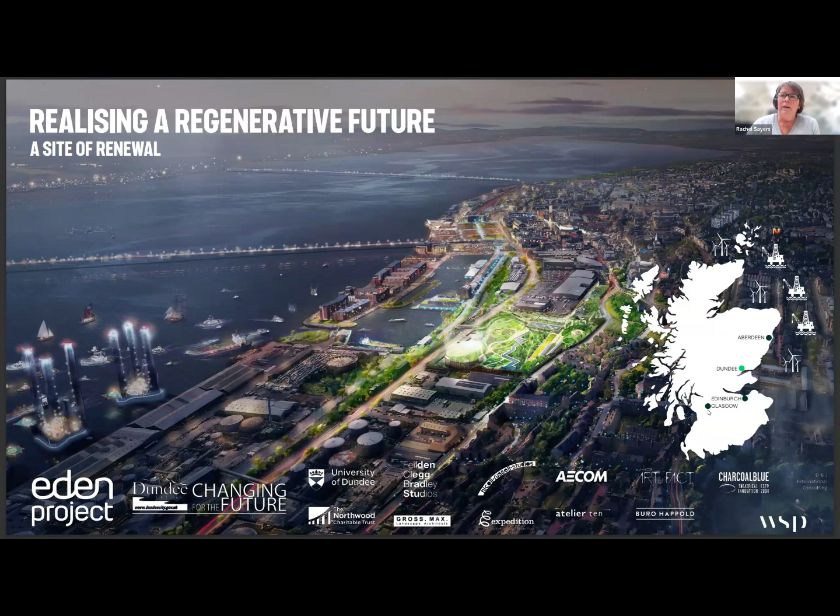For any designer, being given a brief which starts with a charter is an enviable position, if slightly intimidating. This charter from Eden has the twin purpose of guiding both design decisions from the team for the built and the grown scheme, but also of guiding how people can have ownership of the project, the social narrative, and the social and economic regeneration. It sets out a set of principles which guide and shape the interactions between Eden and the place.

I think the narrative is really embedded in this idea which the creative team at Eden have come up with, which is that we are living at a moment where we look back to a deep past. We have an anomaly of crisis at the moment, but they have a hope that there is also a long future.

So the story that they're telling people who come to visit this scheme really is one of the parallel tracks of human history and natural history, of how we have depleted the Earth's resources, and how we could become more aligned over time, looking forwards, if we reflect on how we behave, and behave differently going forwards, inventing new stories, new futures of a much more circular nature.

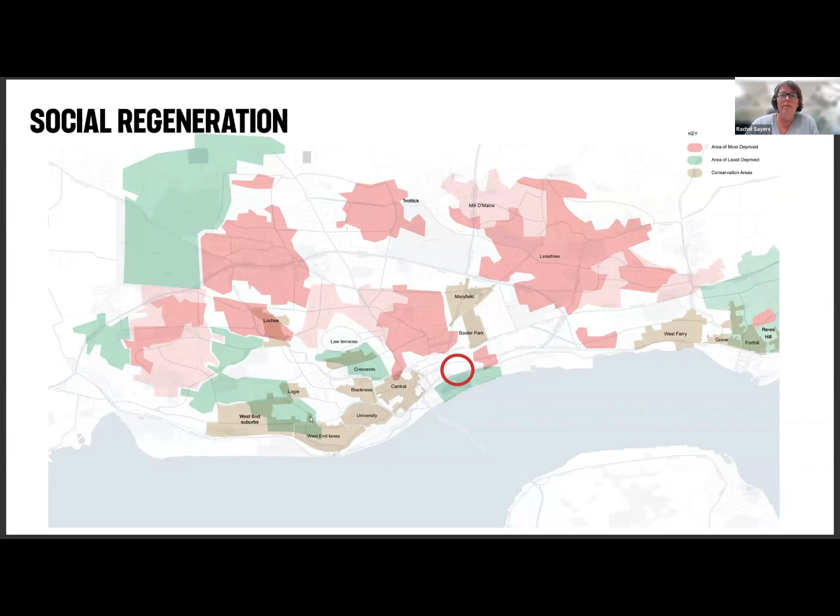This is the spot where Eden will be located as a sort of hub, but really it's about having a whole set of places throughout the city. It's the first time Eden are thinking about being in an urban setting.

And I think there's a real sense of wanting to engage with the citizens of Dundee, and a coming strong sense of ownership.

And for that, there has been a reinvention of the 9 trades of Dundee into a set of future-looking guilds. They're people-based organisations, and it means there can be a strong sense of engagement, and they're sort of seeds from which new regenerative ideas and actions could grow. So they are underpinned really by the perspectives and skills needed for the future. Everyone engages with them so wholeheartedly at the consultation events throughout the city, which are ongoing.

There's a long run up to a project being built, and the idea is that these become live organizations with bases in the city, which can start to capture the energy and hope for working differently. So in a way, when the door opens on Eden, all of this will already be in place.

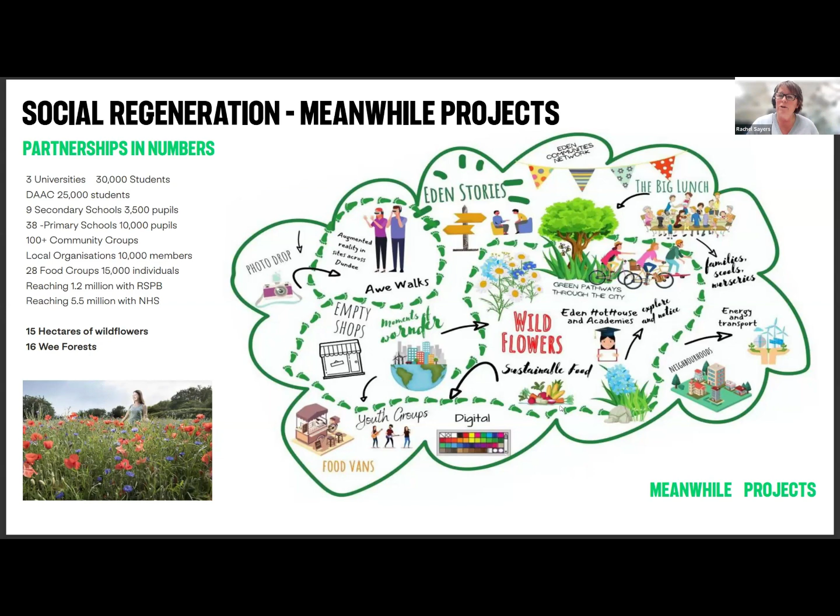If you've been to Dundee, you might have noticed the Wildflower Project, a 3-year funded project which is starting to make visible small pockets of transformation in the city. I'm not doing the work that Eden do justice by just highlighting that, but I wanted to emphasize that this is a twin project between visitors coming to the city and a sort of economic regeneration and education which comes with that, but also really rooted in all the endeavours which happen in the city as well. So it is city regeneration.

The site is towards the east, and it's on a loop, a string of pearls if you like, of other places within the city which exist at the moment and which are to come, and all the regeneration which has already started. So it's looking into a wider picture.

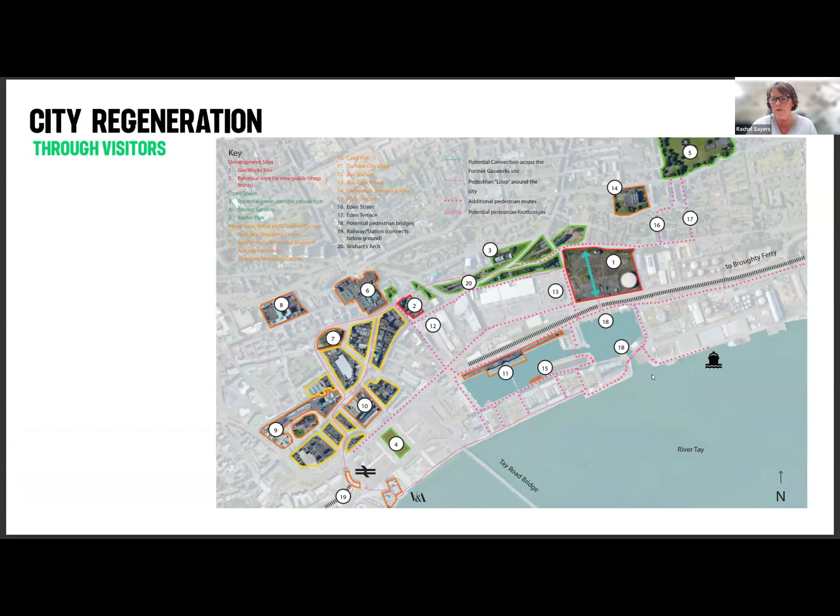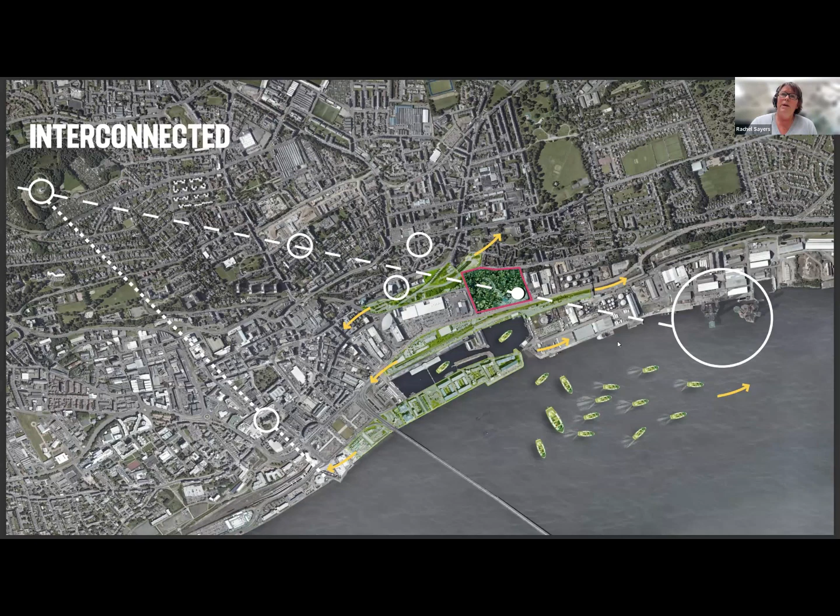But I suppose at the heart of it, it is looking to transform one place quite radically, which was a former gasworks, and then spill out into the city along green pathways, connecting back into the multiple green places which already exist in the city, referencing topography, and possibly even resulting in a fleet of boats which could go around the UK and beyond, educating as they go. So there's a big vision of it being interconnected and highly networked.

Of course, anything which claims to be regenerative — and this vocabulary can be used a bit too loosely sometimes, so we measure how much we use it — but it must be based locally. There's a whole mapping exercise, of which this is just a glimpse, looking at the opportunities to grow and make and build out of what is close to Dundee. So not only is it culturally of a place, but it's also building up a resource locally for future projects and patterns of making and building.

The site was actually half land and half water. It was a part of the River Tay, and it's partly made ground — it was made as part of the whole Dockland development, to bring energy and gas into the city and the wider region, and it remains a key entry point for that.

So it is a symbol of a fossil fuel era when we dug carbon out of the ground and dumped it into the atmosphere. When you design on this site, it's an act of redevelopment and restoration, and it has to increase biodiversity — it has to completely transform over the lifetime of the scheme.

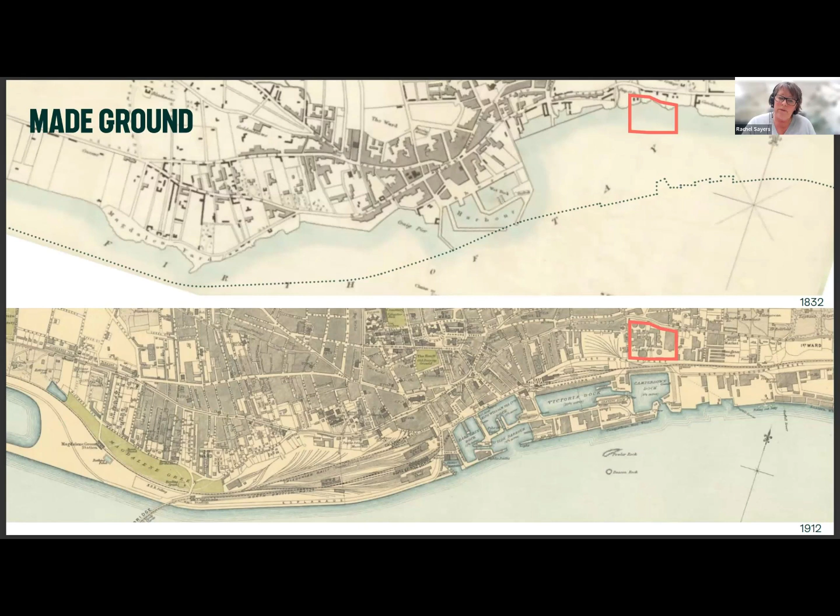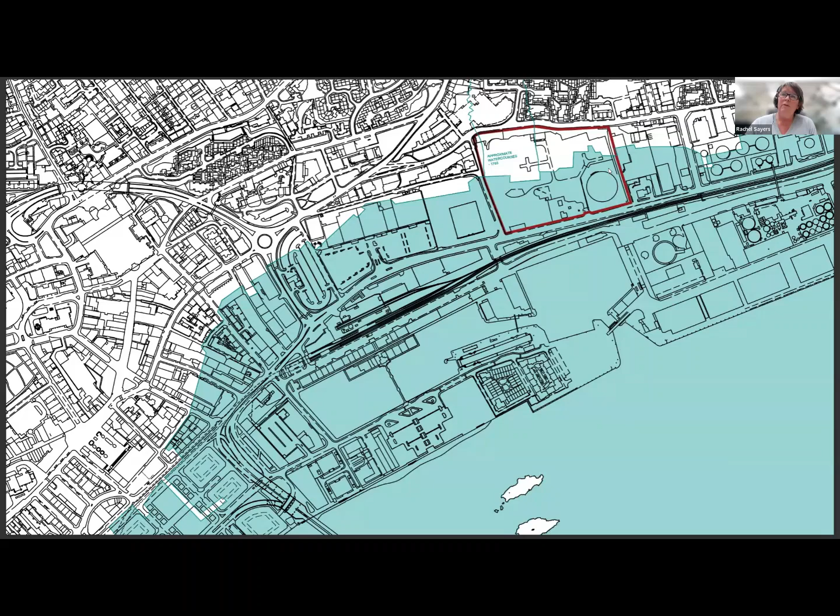So we've got this amazing sense of a water line on a brownfield site, which runs through the centre of the scheme — the remnants of the industrial past. This is the final built form on the site, and it can be seen from space apparently, so it's got a different level of significance. It's outscaled, despite the fact that this used to be sometimes 4 times the height at the moment, held up by gas — it's outscaled by the oil rigs that come into the city to be refurbished.

And we have a sense of the systems thinking that we need. It's just hard work as designers. I think it's easy to fall into the lazy traps of specifying things, choosing things, and having them in a perfect condition, instead of making sure we go back to a fairly raw set of systems thinking.

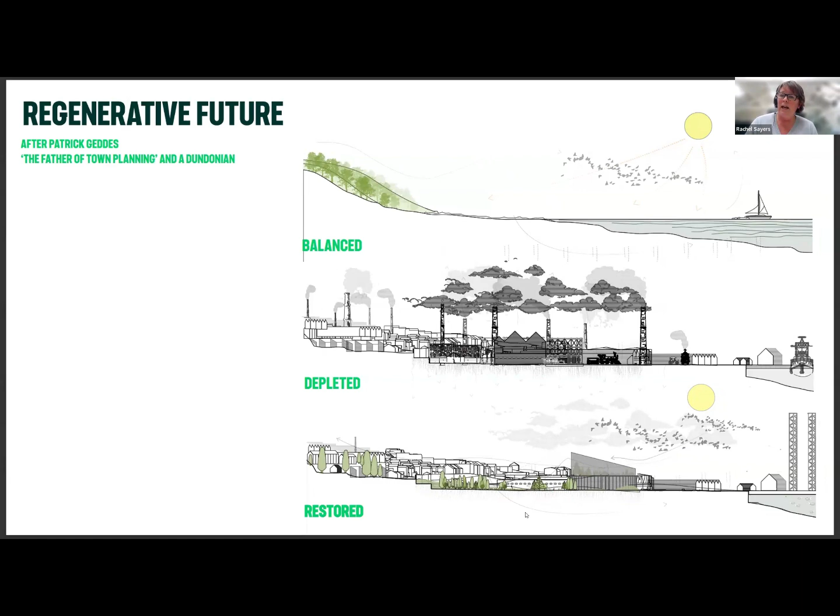Firstly, about the site. It was in balance, then it became depleted, and this was the scale of the operation, which went on for 150 years. And now to a place where it can restore and thrive well beyond this.

This is the site as a piece of industrial archaeology. This is the layers of occupation of the site. It's an amazing drawing we come back to again and again.

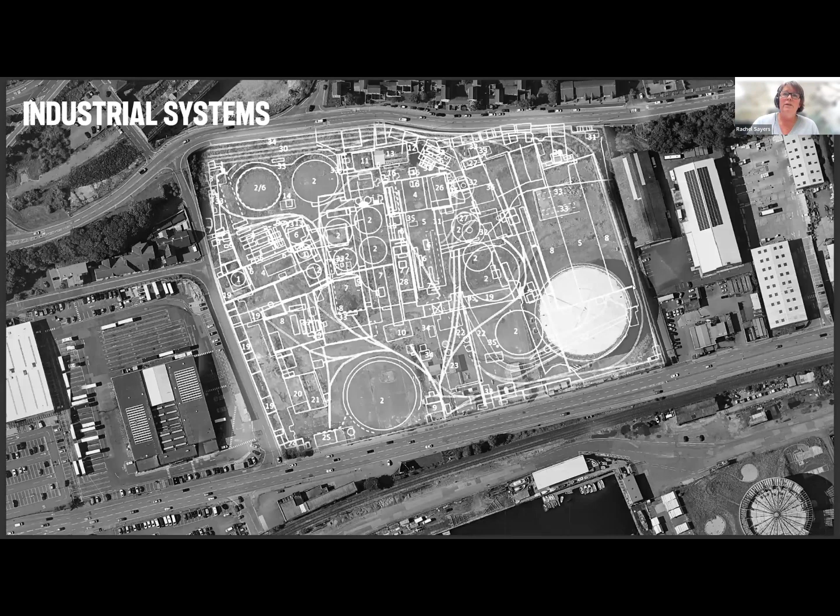I think it's a reminder to us that the circular economy we're looking to create above ground also exists below the ground. You know, 20% of embodied carbon, which normally goes into the building, is below the ground in foundations. So how are we going to not fall into that trap with a further 20% going in above ground?

So this overlay of systems of the past—we're reinvesting the systems of the site as they come forward. We're working with Gross Max, the landscape architects, and the scheme traces the old water line through the site.

The scheme acts as a gathering space, with the main entrance threshold to the city along Foundry Lane. This is where you arrive and land. There are routes down through that threshold, and a new bridge by Nicoll Russell Architects, working in a way that ties the whole scheme into the city.

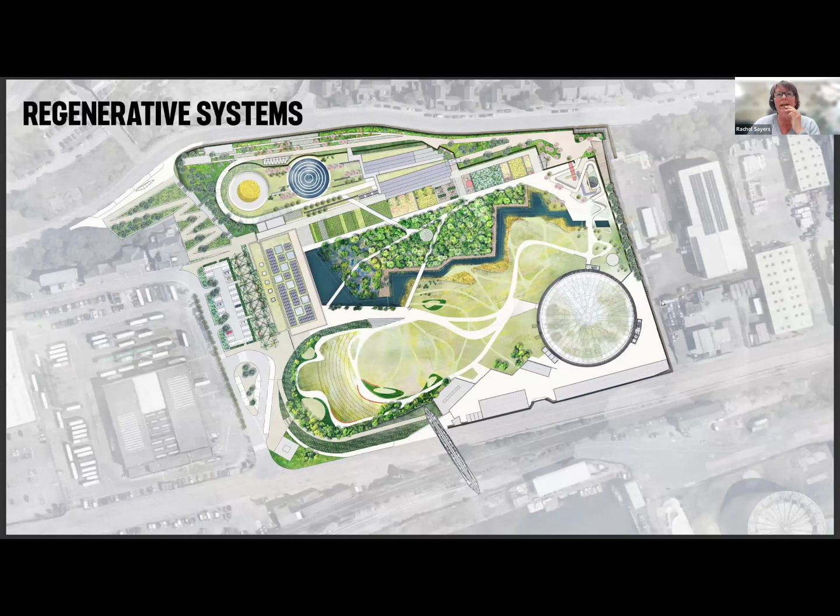So it's an integrated piece across the site, with multiple different characters of landscape. I always think we should be talking closely with the other design disciplines, because it's not just architecture—it's a whole set of systems which exist.

Just to help orientate yourself, here's an entrance point for a building called the Valve, which is outside the pay barrier. So it's a new room, a new space for the city, with a new sense of arrival—a reworking, reinvention and recycling of the gas holder at scale.

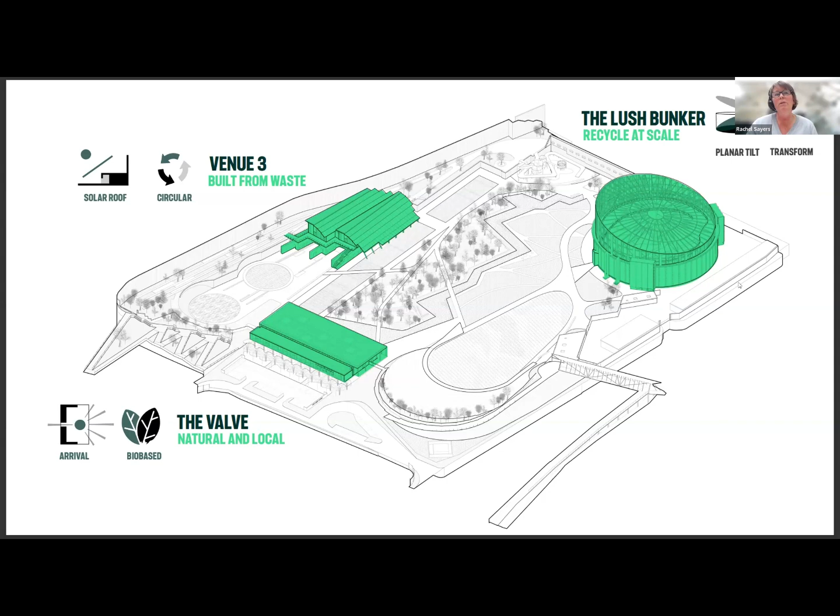And a new piece which relies on this upper platform on the site as it is at the moment—a new piece built from waste, a picture of reuse and recycling.

Of course, there's no real rich soil there, so it's going to have to be rebuilt, and habitats will be established.

Our drawings always show something which is sort of 15 years on, but it's basically presenting a picture of where it's all going—energy cycles and material use.

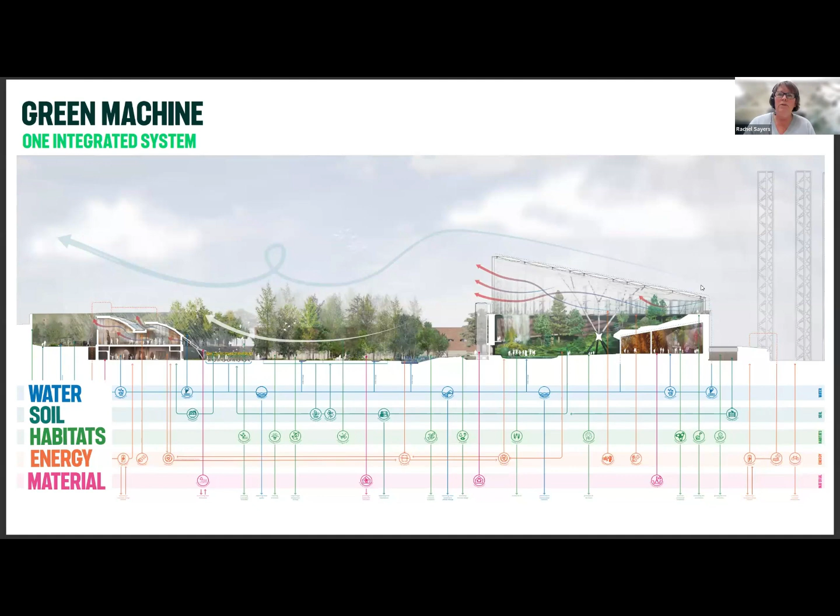So this is a casting forwards, a picture of how it can develop. And Gross Max talk about this 'green machine,' because really the foundation of the whole thing is their landscape and the waterscape which they develop.

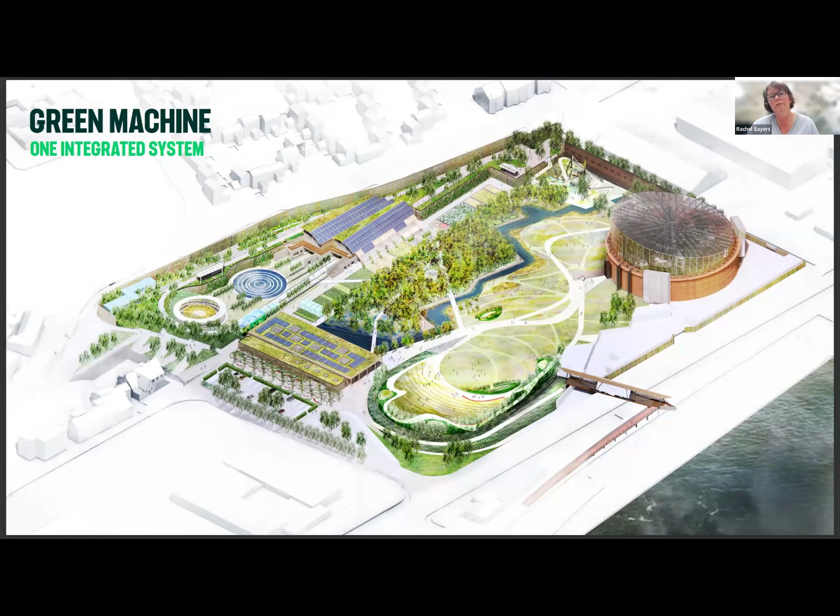And this is more than recreational—it's useful. So if there's sudden rainfall, it's an absorber so that this whole site doesn't flood. And it can also be used for play and recreation.

So there's a whole layer of different character types of landscape, but one integrated system in which the buildings work—each building captures rainfall and sun to power and create energy.

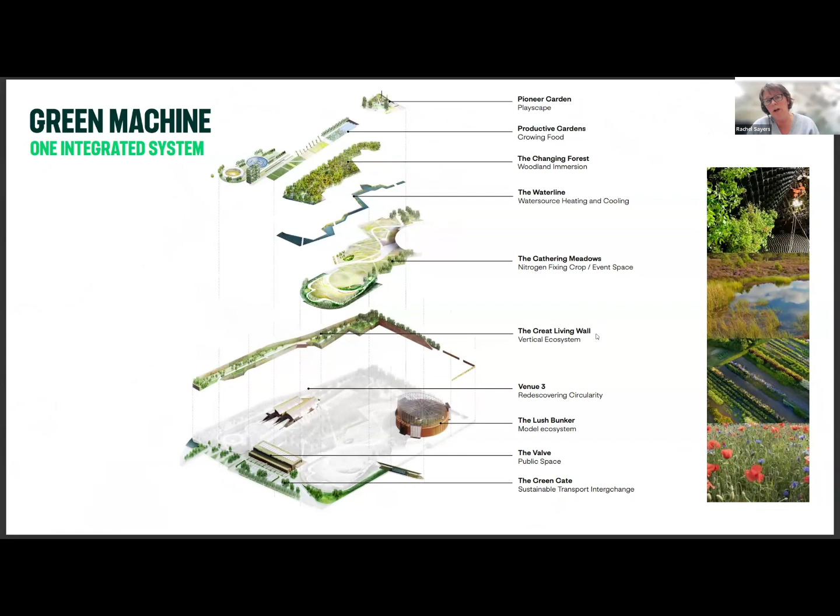So it's very much a circular system. And there's a gift on the site really, which is a huge stone retaining wall which faces south.

They've termed it a great living wall, which will have a whole multiple variety of environments stretching along it—habitats that will be formed, pockets of productivity, seasonal planting, and all sorts of things like that.

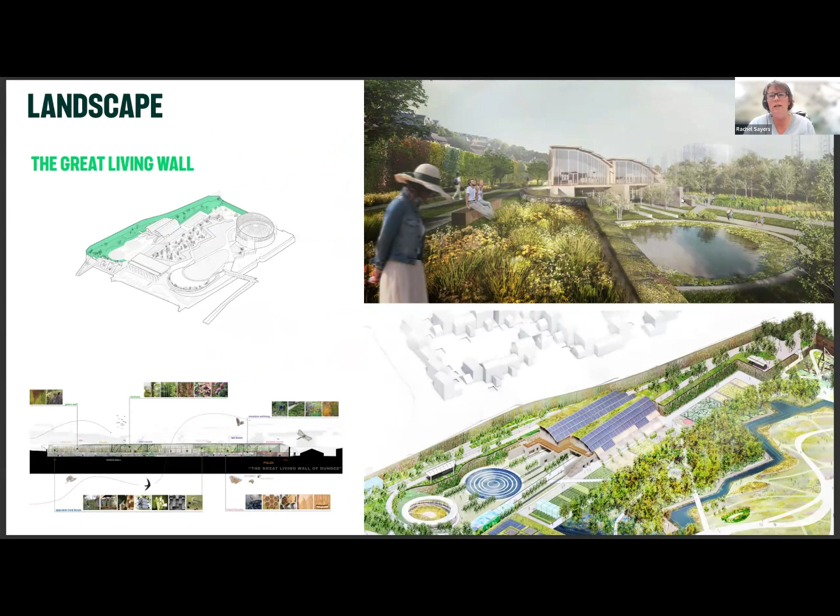I mean, all of this is quite propositional. We have planning, so it's real, but there are also lots of questions still to ask. We don't have all the answers yet, and we're still looking for the best possible solutions to take these industrial remnants and grow them.

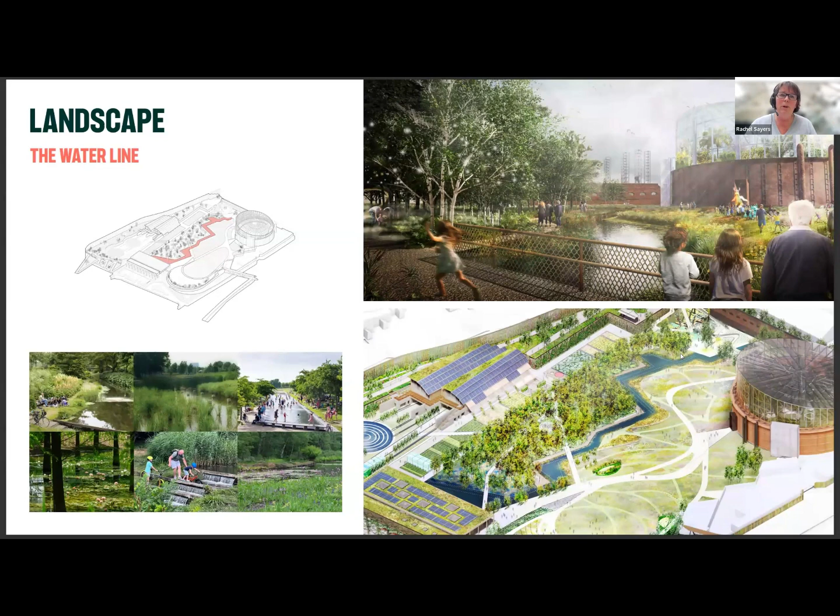To grow them into a place which is both for visitors to come to, to learn and think through, but also for people in Dundee to come and use in their communities.

I think Eden Cornwall has over 600 partnerships with communities. It has apprenticeship schemes, a vast range of educational learning programs at all stages, and over 50,000 school children visit the Cornwall setup every year. So it's really got the door open very wide.

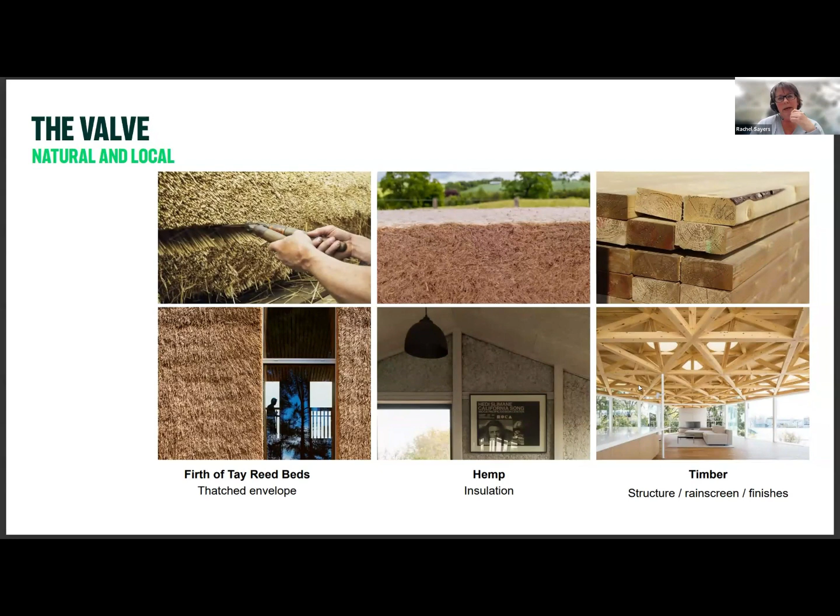So just to take you through very quickly the three buildings. They have an agenda to demonstrate a regenerative process. This is the point of orientation and amenity here at the site, tasked with demonstrating natural and local use. So we're tapping into bio-based cycles. And it has at its entrance an extensive green structure, which is made of, we're hoping, old telegraph poles. It's a marker, a canopy for the city, and a civic scale sort of venture.

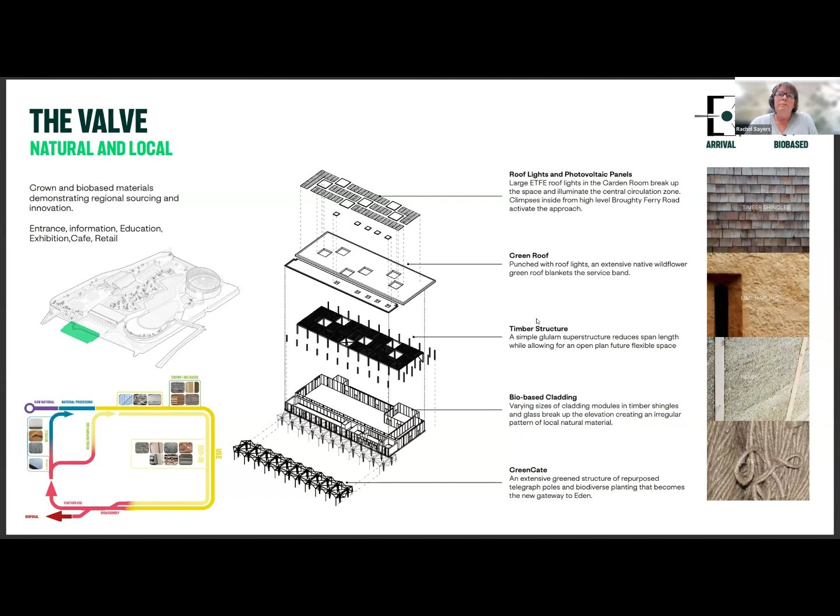Every time we think about materials we're using, we're trying to draw them and describe them in a cyclical way. Which part of the cycle are we getting materials from? What proportion of each building comes from which stage of the cycle, and where will they go? Could you pick this building up and put it somewhere else in the future? I think we've got to a level of detail where we're thinking how this is made, and this is just a glimpse really.

We're working with expedition engineers structurally, and I think one of the challenges is this issue of transforming how we think about how we support buildings underground. Expedition have come up with these conical structures, which vastly reduce the amount of cement in them, and they also occupy a very shallow part of the site. So when it's remediated ground, we really want the whole scheme to kind of float across it rather than digging down and making complicated junctions. There are these pointers towards solutions here.

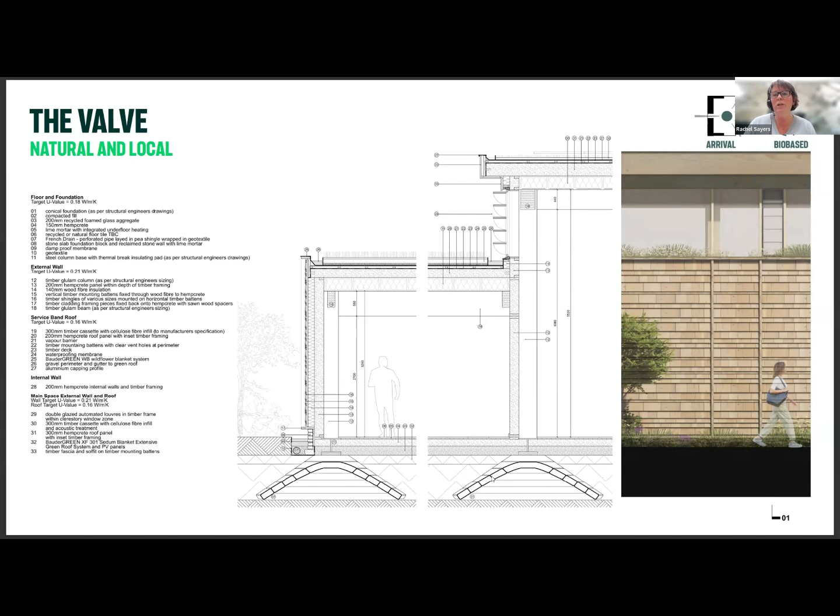I'll keep going because I know I haven't got much time. At large scale, we're reusing the gas holder. The way we're forming the structure of this lush bunker, it's two worlds. When you go into it as a visitor, it has a dark scene at the lower levels and a living forest at the top levels. So you're invited to take a journey through deep time, talking about the formation of the earth and the laying down of the coal seam, to witness human extraction, and then emerging into a planted world of abundance.

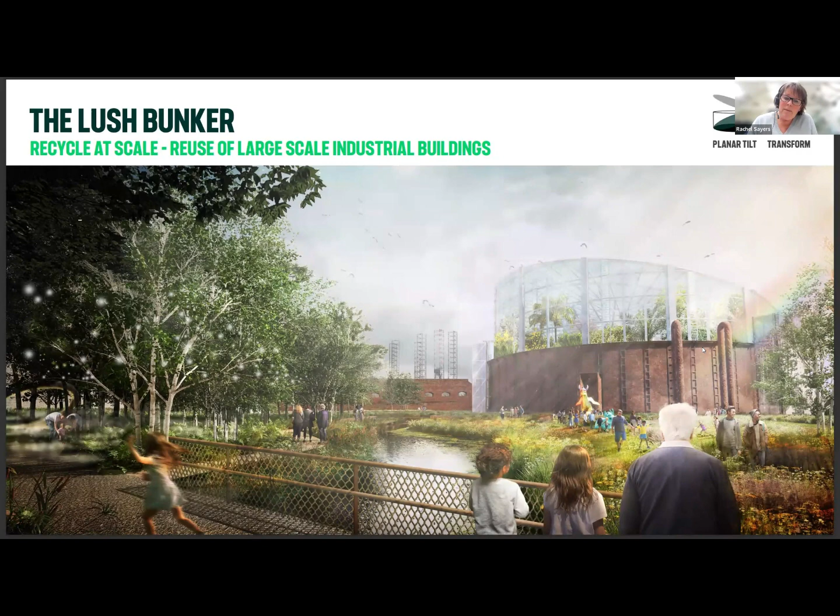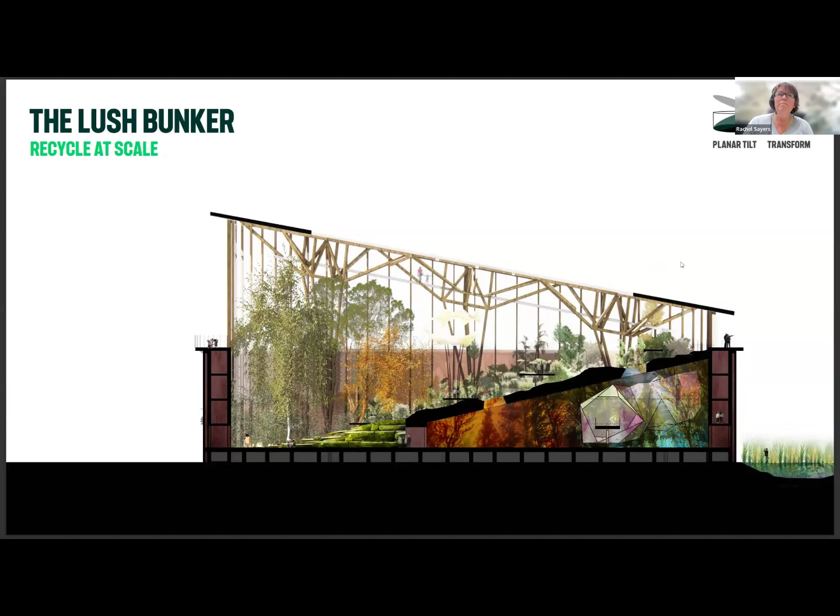So this is what it will look like inside, we think. This is sort of 40 mil thick steel, and we're obviously going to try and reuse the foundations that it's on. The whole structure of these is actually very lean because it was held up by the gas, and we need to find a new support mechanism. That support mechanism is going to follow the same structural paths as the existing gas holder, so to try and make it lean in terms of its use of materials.

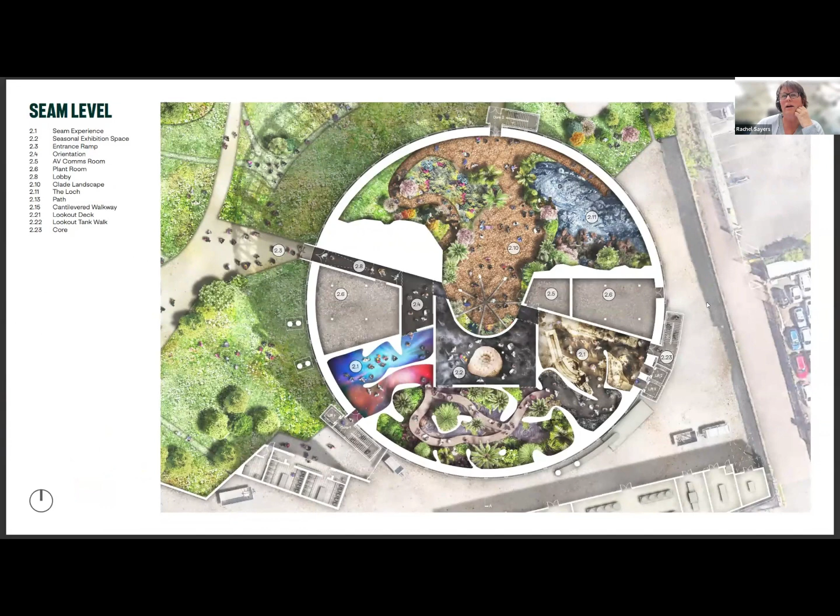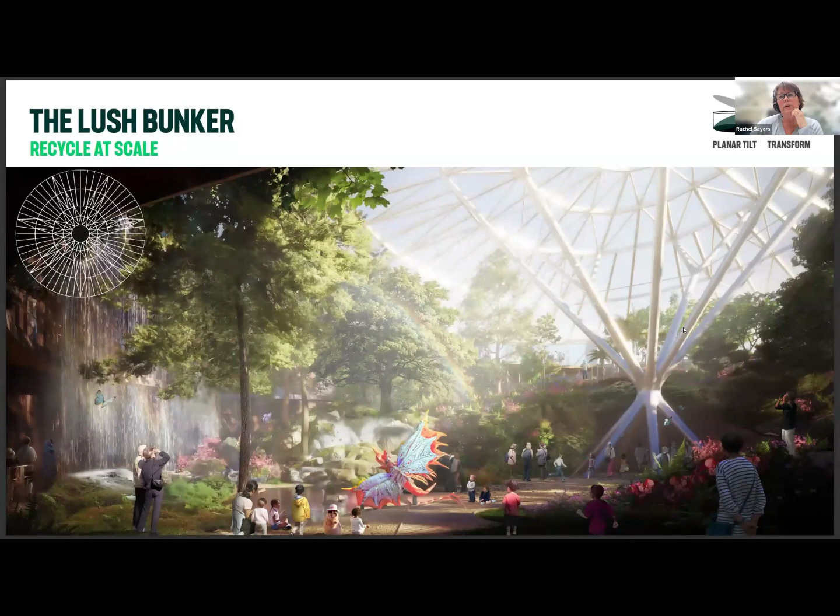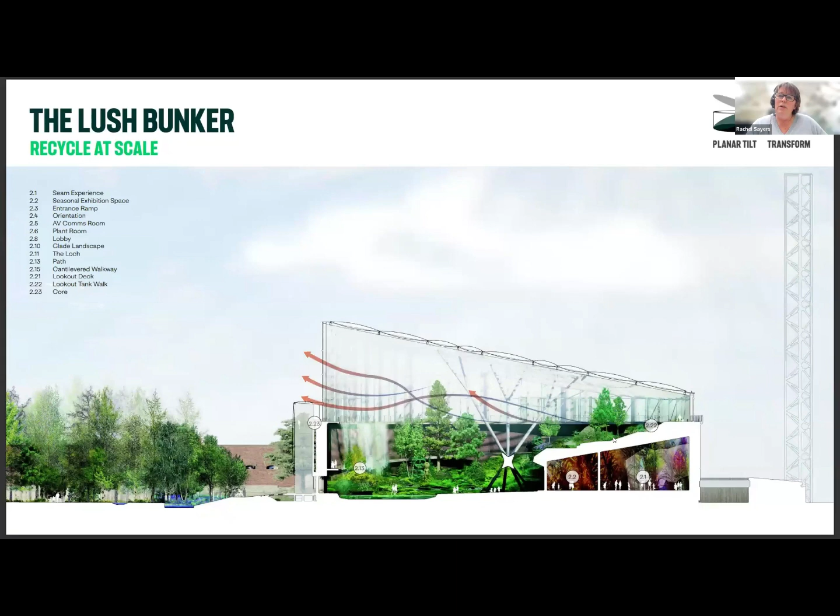This is a picture really of the immersive experience to uncover the storytelling, from below this dark seam that you can go up into the living forest beyond. There's been really careful consideration of how you make this a comfortable environment for the plants rather than the people, working back from the environment we can produce with passive means and the planting which would suit that. So this is deliberately not tropical, it's meant to be native species, but a sort of thriving environment. Below ground, this dark seam, and above, this living forest.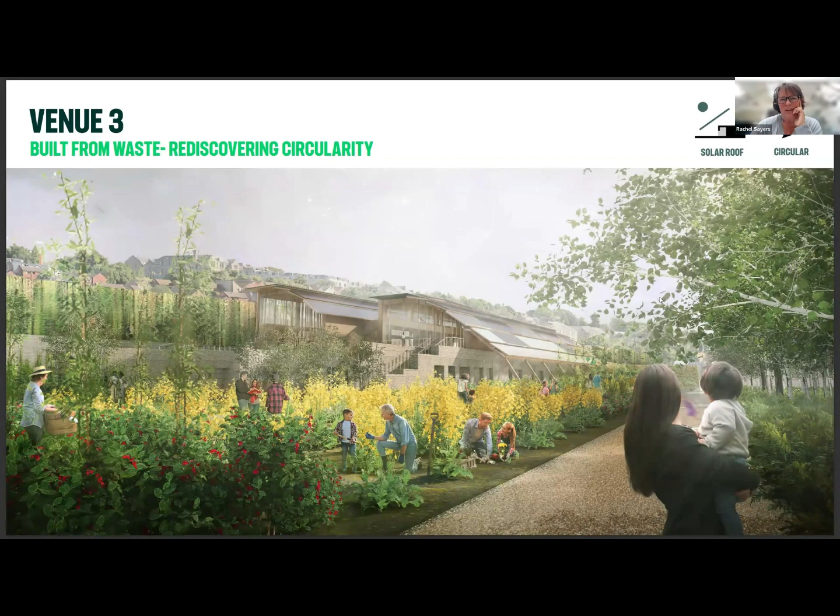The final space has an agenda for demonstrating how you could build and reuse waste - really harvesting, or urban mining as they call it, from the city. We've had discussions with Dundee City Council about tapping into the planning system so that you can maybe pick up materials from demolished buildings and reuse them in the city.

The building recalls the rich history of Victorian greenhouses and other agricultural forms, which are highly functional and beautifully engineered. This has the opportunity to face south so that you're really harvesting the resources and the environmental forces that you have.

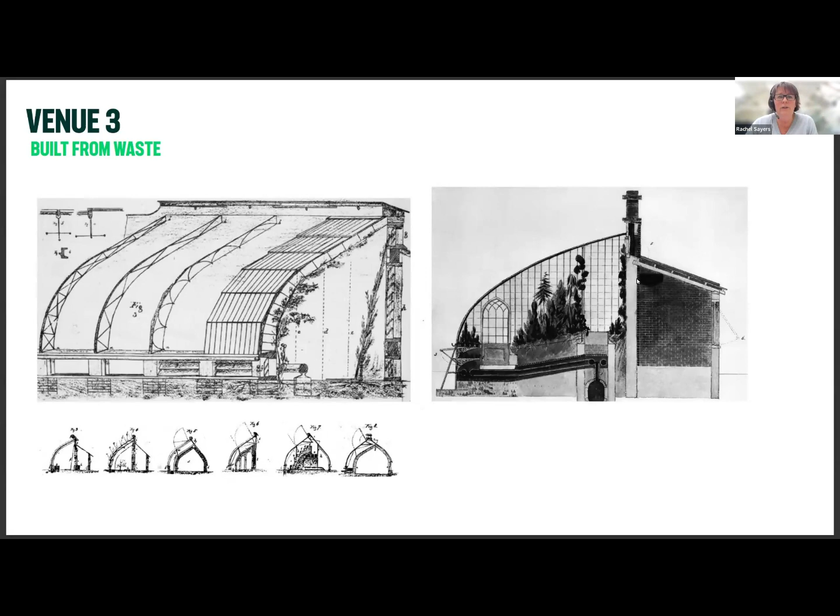So there's a huge exhibition space where people will be able to reflect on what they've learned and think about the new stories that we need to underpin a different way of thinking and behaving. Here you can see the echo of the Victorian glass houses, but they're not glass. It's a repurposed steel frame, which extends down into the landscape, forming a sheltered space for visitors to sit.

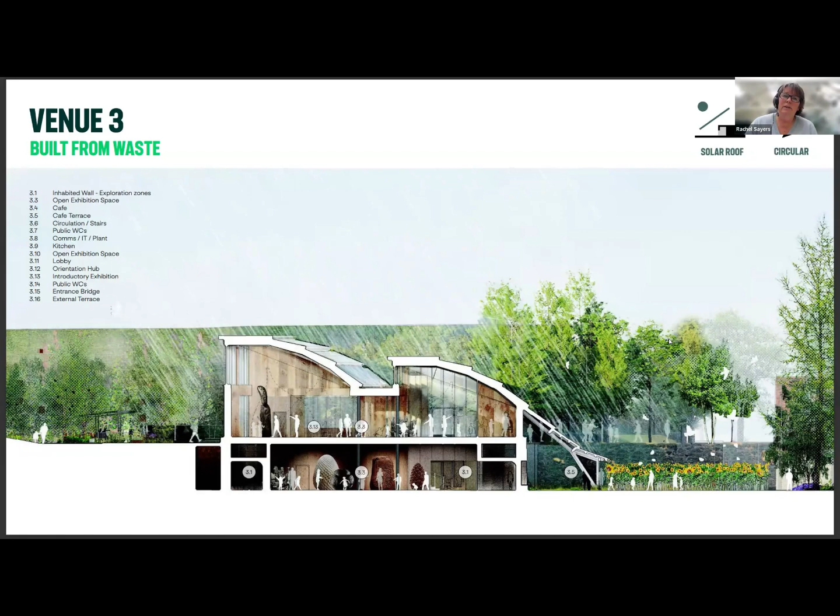Yeah, so looking to capture materials into different frames. I think I'll leave it there really, but it is obviously a project which is full of hope, but there's also still a long way to go. I'm hoping it's a story we can share regularly along the journey, to see what we discover and the solutions we come across. Thank you very much.

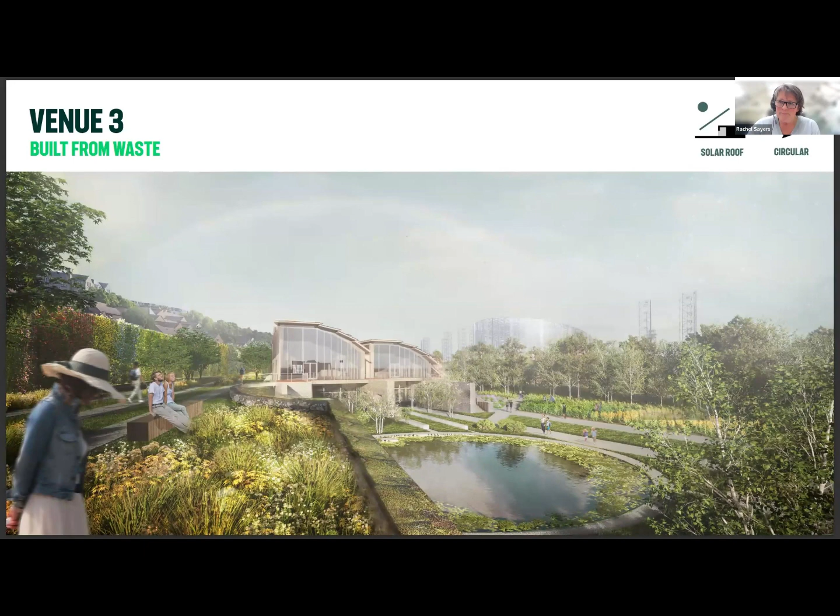So I'm going to change the narrative from energy to community. As Gloria mentioned, I've been a researcher at MEARU for the last 11 years, almost coming up 12, doing building performance evaluation, going to people's social homes and finding out how they use their homes, not just for energy, but how they feel comfortable in them.

Working with these households over this time, I've observed that many individuals struggle to adapt to our built environment. And to me, that highlights a lack of resilience in our society.

So earlier this year, I co-curated an exhibition which showcased 30 years of MEARU's research, which focuses on all aspects of environmental architecture. While reviewing the archives at the Glasgow School of Art, I was struck by materials from the early 1980s, where people were campaigning against fuel poverty. That led to MEARU's first project, monitoring a passive solar retrofit in 36 thermally substandard homes in Easthall, Glasgow, led by our founder, Colin Porteous, in collaboration with Heatwise and the Easthall Residents Association.

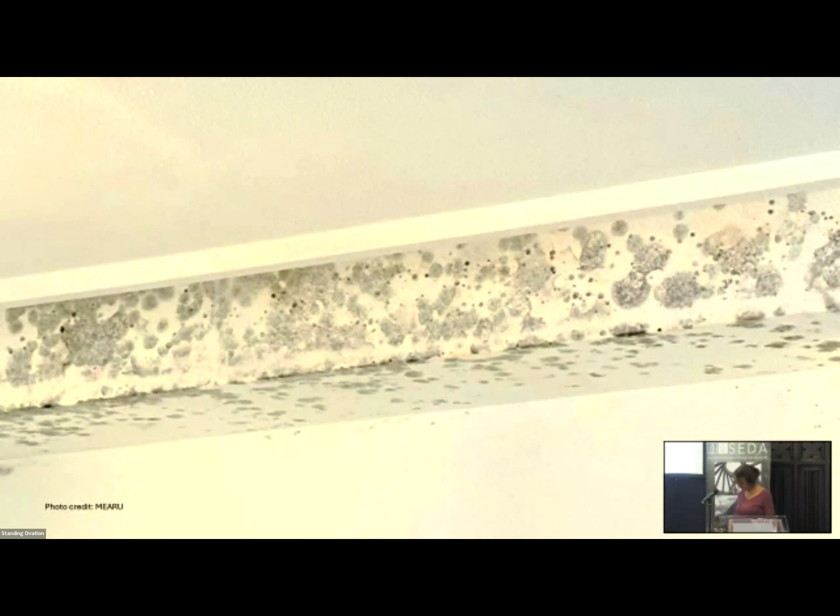Even though Kathy's struggle dates back 40 years, mould in homes remains a crisis today. Nearly a quarter of the UK population reports its presence. And we're waking up to the increasing health impacts linked to ultra-processed lifestyles. Urgent action to tackle all these issues is needed.

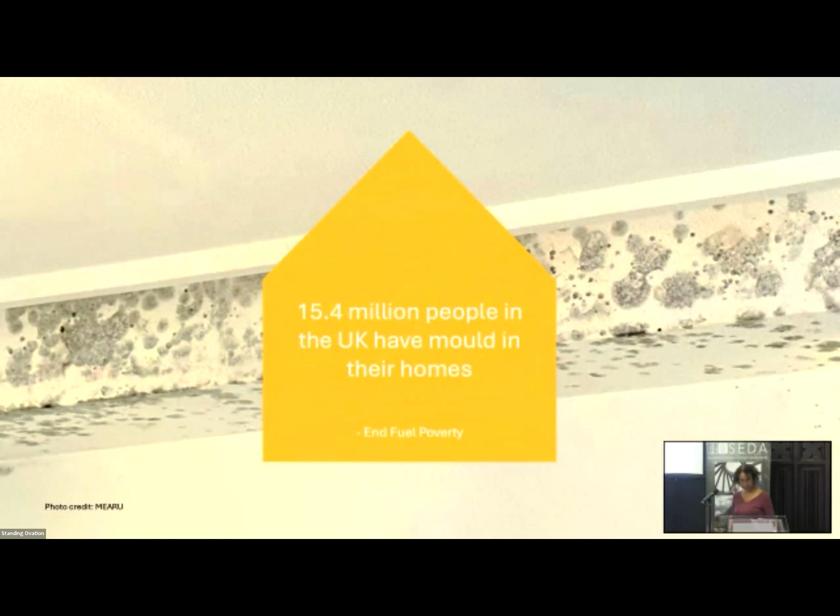When I was invited to speak at this conference, I'd just begun reading Ultra-Processed People by Chris van Tulleken. The parallels between our food system and modern building materials struck me. Talking about our chemical food system, he notes these substances enter the diet gradually, but the incursion gained pace from the 1950s onwards, and now constitute the majority of what people eat in the UK. He highlights a new ecosystem fueled by money, where we are the prey, the source of money that powers the system. Competition for that money occurs between an entire ecosystem of constantly evolving corporations, including deceptive marketing, bogus court cases, and secret lobbying, all vital for corporations to extract that money.

This is mirrored in our buildings and the processes that take place inside them, and Sue mentioned that earlier today. Many of you here are familiar with volatile organic compounds in building materials. However, beyond the structure itself, there are many ways indoor air quality is impacted, with contaminants from our furnishings, cleaning products, and personal care products.

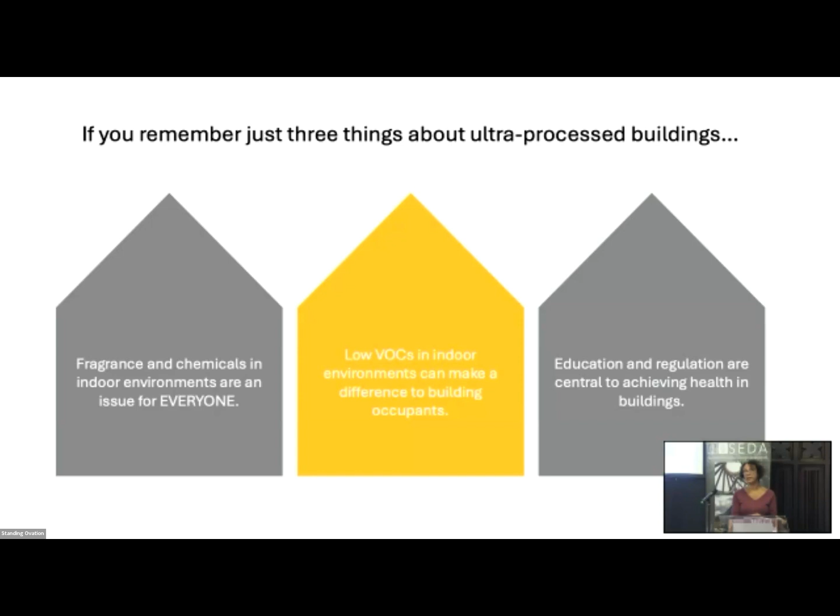By advocating for a reduction of chemicals in all aspects of our buildings and for fragrance-free policies for public buildings, design professionals can normalise the needs of a large sector of society. Now, my last slide, I will just put up and I will not read. Thank you.

After the collapse of the World Trade Centers due to the terrorist attacks in New York in 2001, there was a rapid and incremental increase of carcinogens and VOCs in the air due to MDF and the furniture burning in the building, the furnishings. Everything that was in the building that was caught on fire caused massive problems to health, to air quality, and to some extent, nothing's changed. So thank you for raising that.

As I said, this is going to be a very difficult act to follow. My name's Arno Verhoeven. Thank you, GLOW and SEDA for having me. I'm not an architect and I'm not an engineer. I'm an idiot. And I say that in the most important way.

I'm an idiot because, like Mike Michael, the sociologist from Sussex, I stand outside of society, and when people look at me, they don't understand what I'm doing. They don't understand why I'm doing it. They just look and scratch their head and go, what an idiot. But the point is that I'm doing it on purpose to say that actually we need some of this divergent thinking. We need some of this disruption. We need more people to stand outside and do crazy things. We should be celebrating idiots. We need more idiots in the world.

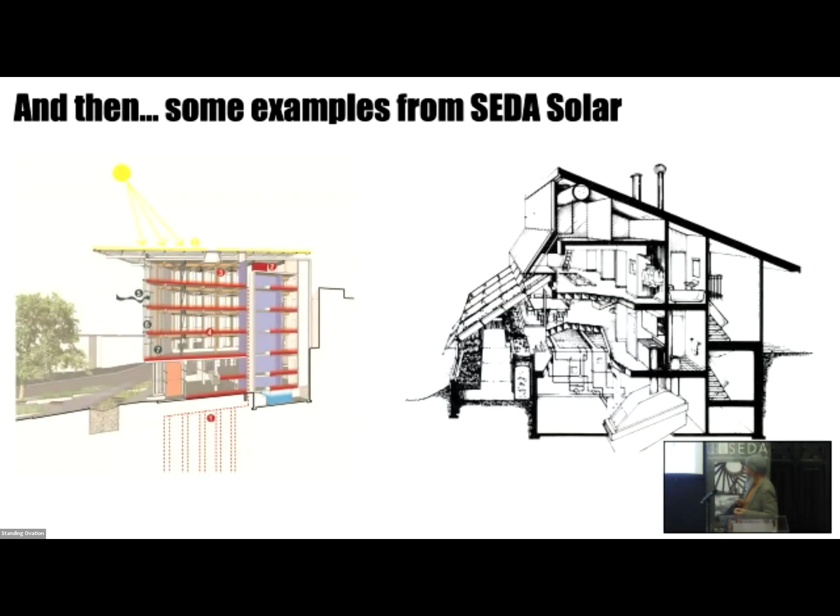And then we've got a clicker that, oh, there we go. On the left, a place in the Netherlands in Haarlem, a seniors community hall, which is using passive solar again to create spaces with warm air circulated through the sunlight.

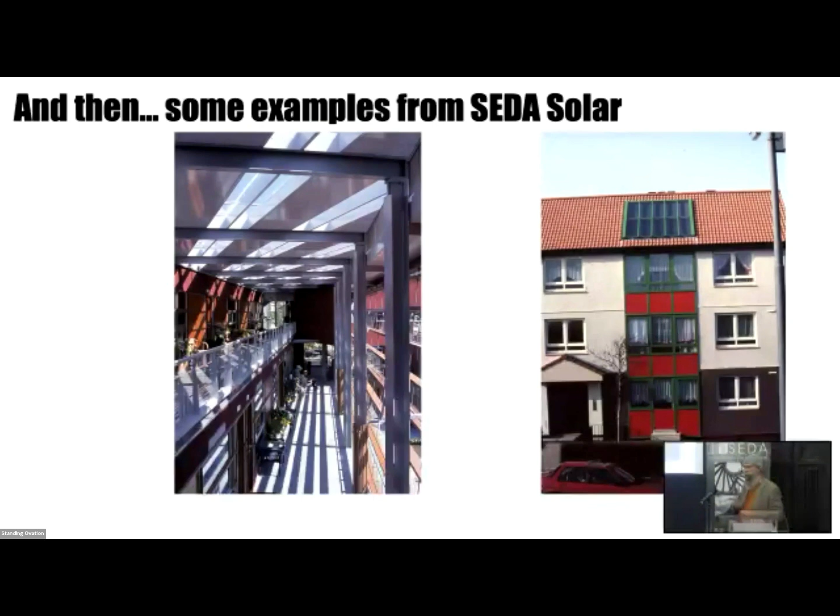A house in Austria using various kinds of solar thermal and solar capture units, very interesting technology. A place in Ayrshire, very simple, an enclosed balcony, which uses the passive sun, the heat, the infrared, to heat the solar to make a buffer, create warmth.

These are all really cool things. But when I look at them in my kind of design training, and that might not be everybody else's design training, so when I look at these pictures, and these pictures are really important, I notice some things.

And I go back to the two definitions that I put up, and I say, well, design is what I'm doing, not what I've done. I'm only seeing pictures of what I've done. So I'm missing something. I'm missing what actions and decisions were taken in these pictures. They're great pictures, they're beautiful things, but I don't see the design anymore.

I also don't see a place. I see a building, that is a kind of place, but I miss the bigger place. I don't see the postcode, unless the building has its own postcode. I see a clear definition and a boundary, but perhaps not the way that I want to see that. So when I look at this building, I notice a couple things.

But I don't know how that outcome has come about. I think we can extrapolate, but to some extent, the architect's not here to tell me that story anymore. And that for me is really important. I want to hear the story of that outcome.

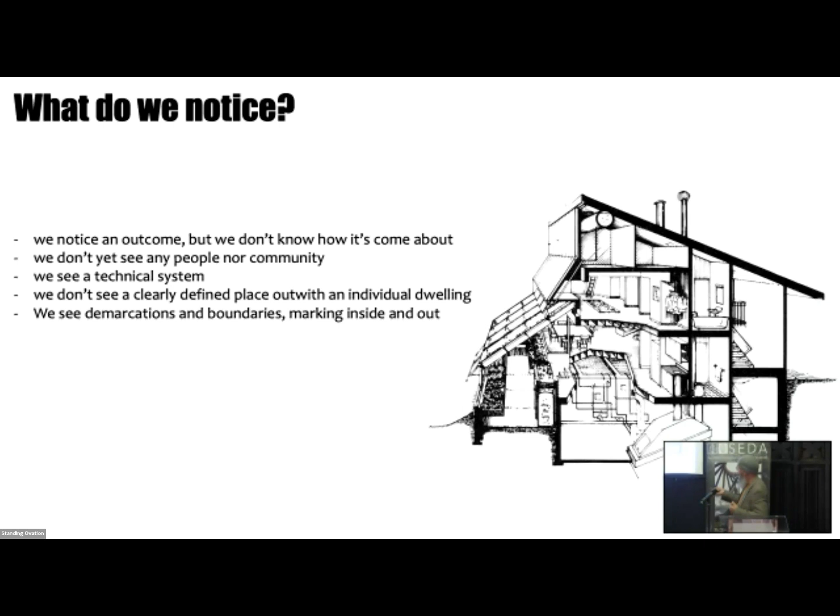I have yet to figure out how I can be in two places at once. If anybody in the room knows how to do that, I'd love to chat. But I can't be in and out at the same time. When I'm not in that house, like all of us right now are not in our homes because we're here, what's going on in our homes? What's going on between our homes? These are the kinds of questions that are really important to me as a designer.

That looks really lovely. But then I go to my street and think, whoa, that's a postcode. How am I going to do that? I don't qualify for a community energy scheme because I can't get all the people on that street to agree. I have a leak in my flat. I can't find the leak, but I'm pretty sure water still runs down. Given I'm on the ground floor, I can narrow it down to one of the three flats above me, but they all deny any wrongdoing. I'm sorry, physics, the water comes from somewhere, and I don't have water pipes above my house - they're below, I know where mine are. So how are we going to do a community energy scheme if that community doesn't fit the definition of the Scottish government? To some extent, the community as a thing is fixed.

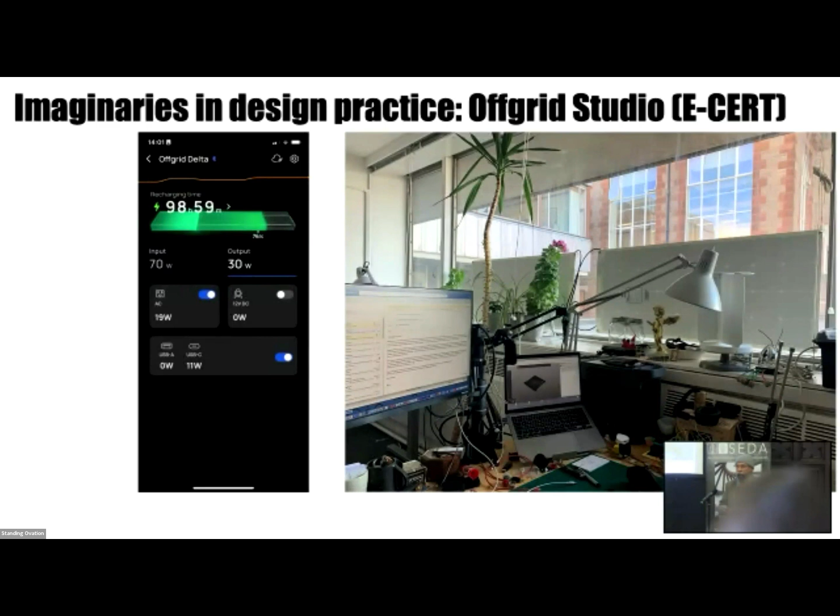So how do I do this? I'm not allowed to go on the roof, health and safety. I'm not allowed to integrate with the interface or the envelope of the building. I'm not allowed to do anything. So to charge that, I've built a portable power station, twice as large, that sits in a bike trailer, and I go and find the sun. Half of my day is spent sitting outside, charging up another battery bank that I've built to charge the battery bank in my office.

But a bike trailer is really difficult, so I've gone and built other things. I build all kinds of things. This is me making my lunch, sitting outside. There's my solar panel, this is my battery pack. This is me heating my soup. This is absurd because it takes me 45 minutes to heat a can of soup.

And people sit outside and go, what are you doing? There's a microwave inside. It's like, I know, but the microwave requires somebody to build the microwave, somebody to build all the steel that builds the microwave, somebody to build a boat to ship it from the factory to me. Then they need to build a kitchen. This is just a suitcase with a battery in it. 45 minutes seems to be a real interesting compromise for challenging the whole socioeconomic system.

And if it does collapse, I can still heat my soup. I don't have to worry about factories in China. I just have to figure out how to make my own batteries.

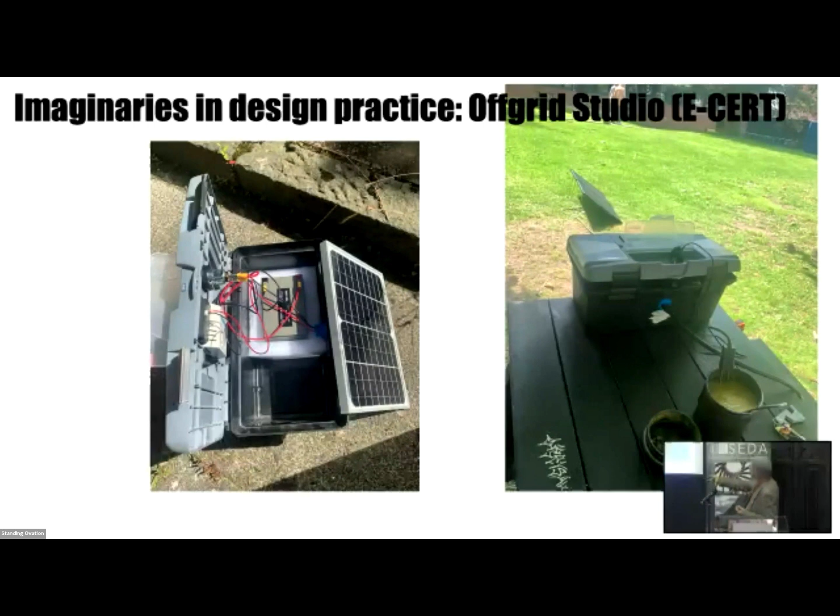This has led to working with artists who want to do outdoor installations. This is me building a power supply for Julien Dupuis, who makes this interactive pump, thinking that I can fully meet his energy requirements. But what he doesn't know is that the conscious part of my research is: no, I can't meet your energy requirements, because I'm going to challenge you about what your energy requirements are. By not giving you enough, I'm going to make you live within your limitations.

So I build all these kinds of things, which is good fun. This has led to working with Fife College, and we're building what I suppose is one giant trailer on the Fife campus. We're going to take half of their campus off-grid, building a self-sufficient nanogrid system, and we're doing it in 3 phases. To start, it'll be solar because it's really accessible. We'll be adding wind, we'll be doing hydrogen, we'll be doing heat pumps - all sorts of energy.

But the question is, why do this? Because we can do it - it's not hard to do. But what's the point? This comes back to this notion of community - there's a boundary there, but we want to expand that boundary. Part of it is, this is a space not only to learn about the skills required to build energy systems.

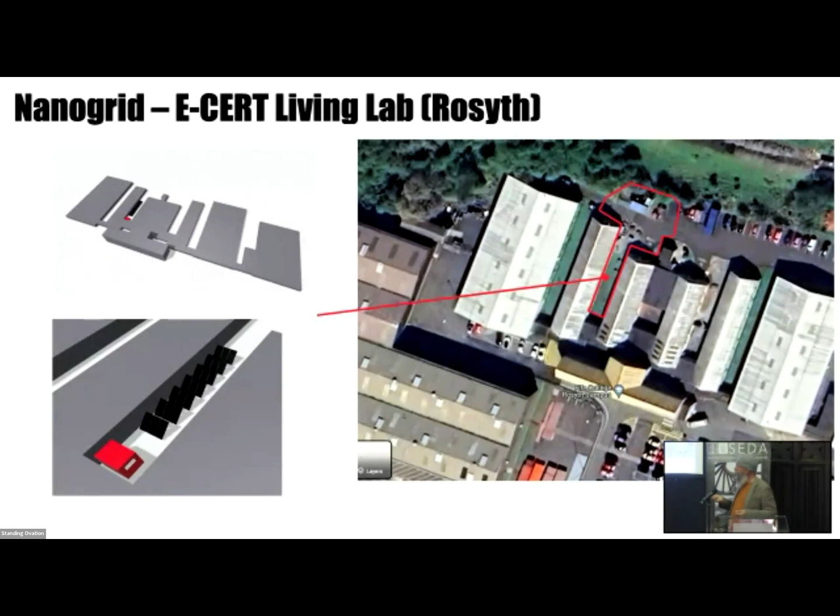So the nanogrid is about how we build the skills required for this transition. Because in Scotland alone, we need an awful lot of people. We need 3,000 welders. So the point here is, where's the design?

The design is in the process of questioning why we accept the system as it is. It's building evidence to say maybe we need to think different. Everybody wants to think different, but then everybody thinks the same because nobody wants to be perceived as being an idiot. Maybe what we need to do is reimagine, not look at the imaginaries and get told what we're supposed to do, but actually challenge what it is we're supposed to do by doing it in a different way and seeing what works.

Maybe we need to have a makeup-free day. Anybody willing to do that with me? Let's just take off all our makeup and just actually live without cosmetics and fragrances for a day. Most people will go, yeah, no, I don't want to go out in public looking like that. Actually, you have the choice. We can make the change, but it requires courage to go outside of the system that you're encapsulated in.

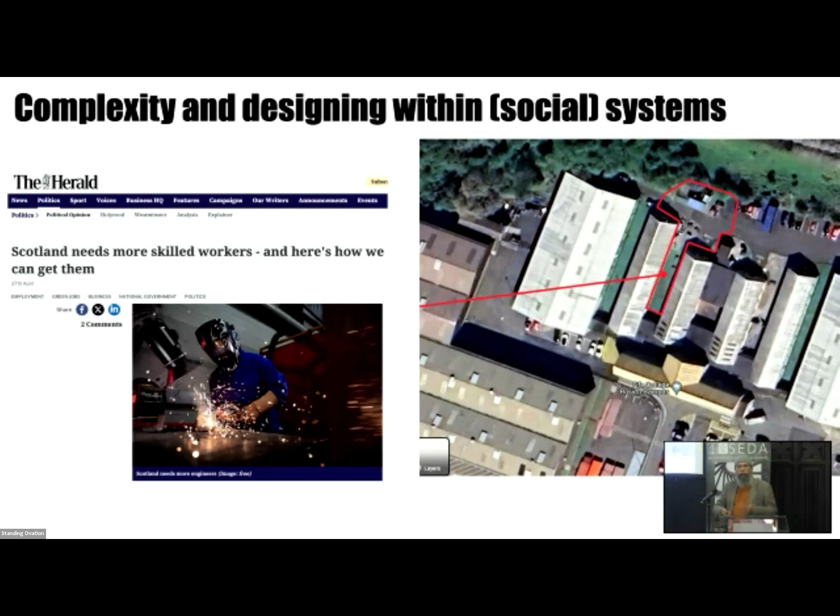Welding can be a sexy profession. I think it would be real. If I had to go back, I'd be a welder.

The other problem is that we got people in large cities. So while we're looking at community energy schemes in places like Eigg, Knoydart, Creel, these are fantastic examples. But does the knowledge translate to the fact that actually most people are living in urban environments and they are continuing to live in urban environments? Now we can go back to the rural environment, but then where are the jobs that support people to live in the rural environment? If everybody in the urban environment suddenly reversed and it was 70% of people living in rural Scotland, we would have, again, different kinds of problems.

I don't think these are problems as much as we just need to be aware. We need to be conscious, as designers, that when we are proposing changes, we have ripple effects. And we have to ask ourselves, are these the consequences that I'm willing to accept?

To some extent, it's about taking care, which is a word that hasn't been really used today. As a framework, I've been starting to work with people on retrofit, and the way that we collectivize, the way that we build communities, is a form of care, because we come together around a shared set of purposes and a shared value. We care about the planet and we care for the planet. We try to give care to the planet, and we try to, because we want to receive, we want the planet to care for us.

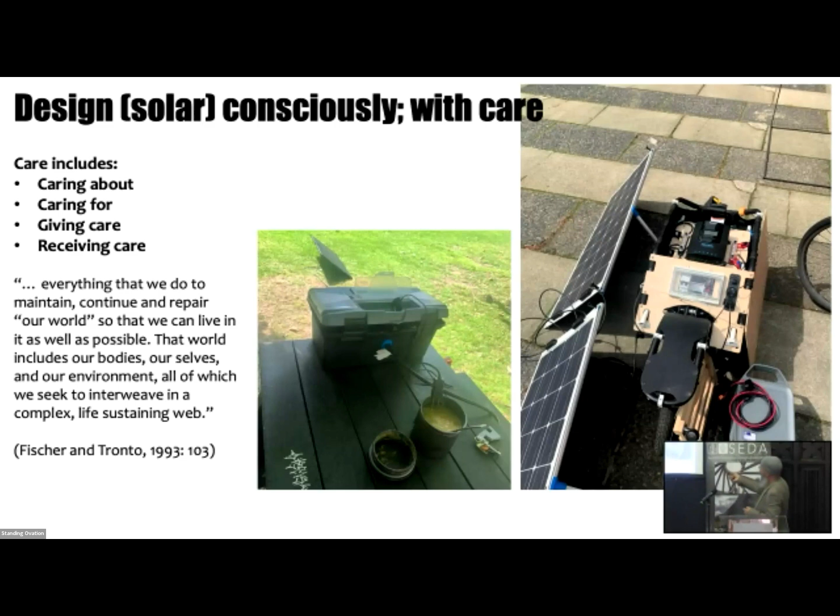We're not really good at receiving. Oh, we're not good at giving care. Oh, I know. Okay, we need to take care, and I need to realize that my time is up.

So I'm going to go, and that's my last slide. Thank you very much.